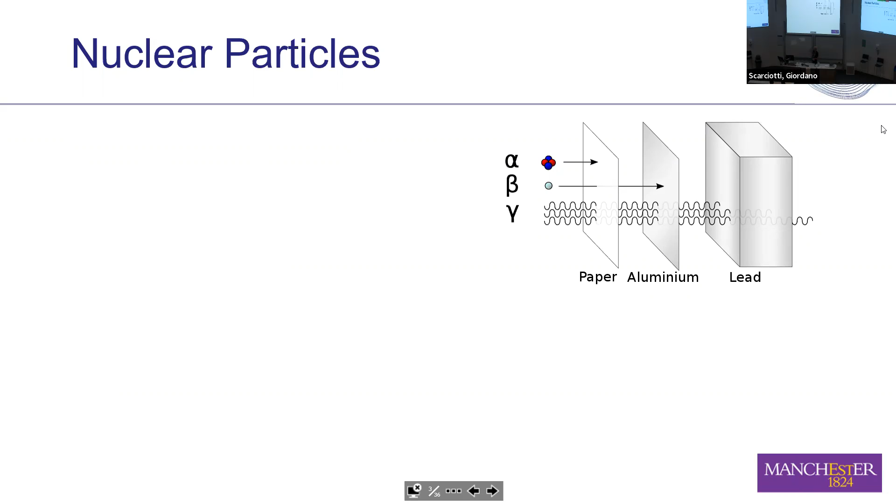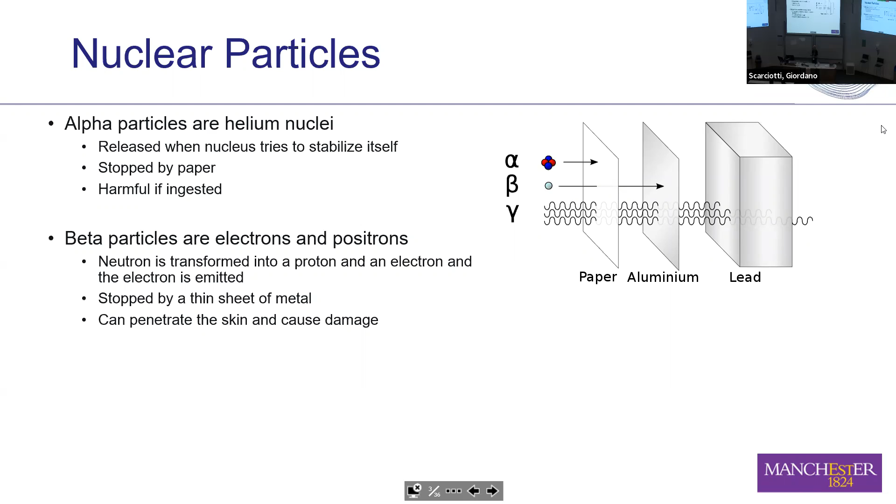So you'll all be familiar with this, but to explain why robots are needed in certain situations, you'll remember from school, and maybe some of you were trained physicists, so you'll be able to prove me wrong. But you've got three main types of particles: alpha, beta, gamma. Alpha's stopped by a piece of paper. It's very harmful, but only when you ingest it. Beta are electrons and positrons, and they'll be stopped by a sheet of aluminium, and they do cause some damage to the skin. And you have gamma, and gamma is probably the heart of the challenge that we have. Gamma will penetrate through large dense materials, so it goes into your body and it causes damage. So a lot of nuclear environments will have alpha, beta, gamma.

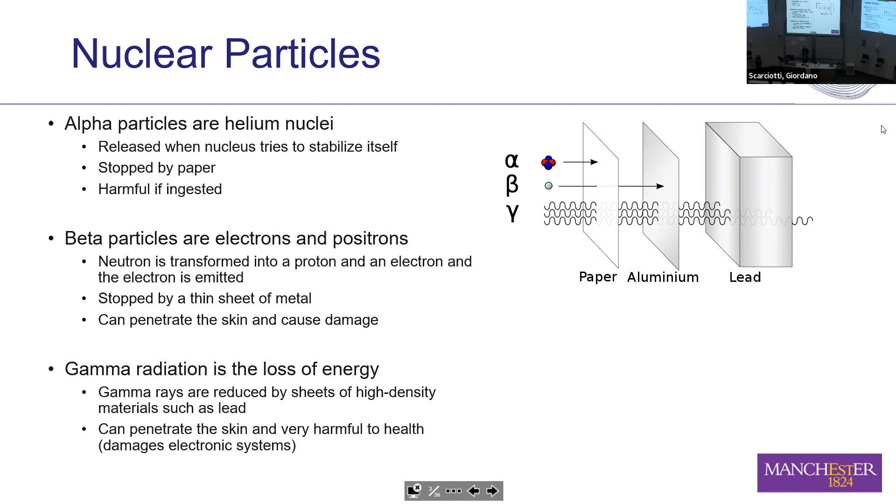And depending on which things they have in there, sometimes it means that people can't go in at all. Sometimes it means people can go in, but they have to wear a suit. So if it's alpha, people can go in, but you don't necessarily want them to go in. And this is really why we have issues with nuclear, and it's really down to uranium.

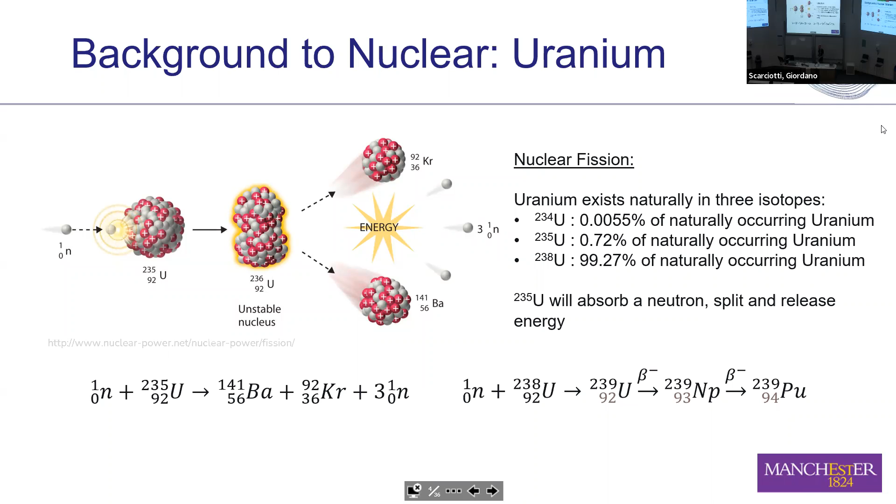So in weapons programs, an emphasis is on trying to enhance and enrich the uranium-235. So if you've seen Top Gun Maverick recently, the bad guys in Top Gun Maverick were enriching uranium so they could make weapons out of it. The alternative one, and this is the approach that we took in the UK after the Second World War, is you get uranium-238, you bombard it with neutrons, and that produces plutonium, and then you can make plutonium weapons. So that's the general theory.

The problems you get - inside this pile reactor, you get plutonium being produced. What you would then do is have lots of laboratories and processing facilities to extract that plutonium so you can make it into weapons or whatever else you wanted to do with it.

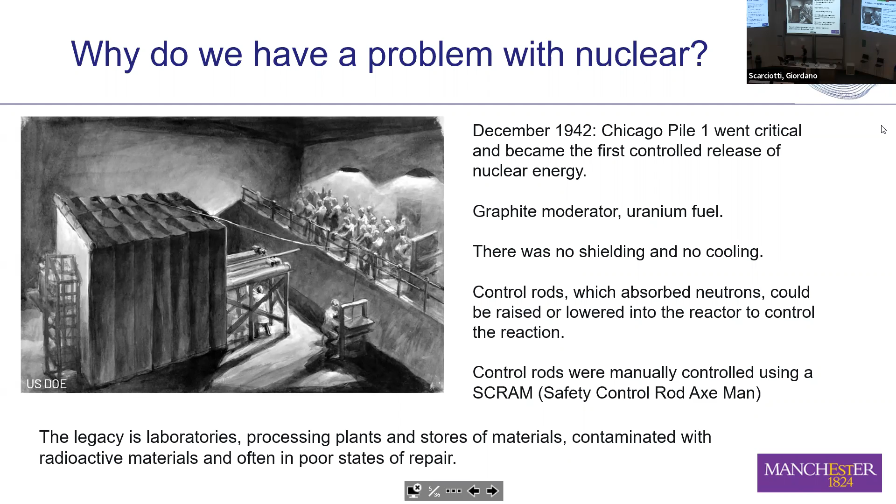Now there's no working reactors on there. There hasn't been working reactors for a long time - it's just a decommissioning site. So what we need to do now is demolish this, make it safe, and extract all the radioactive materials which are still on site.

There are still lots of radioactive materials on site, so we have to safely extract them, store them, and reduce the harm. Most of the things on this site were designed to last for 20 years - that was all developed in the 1950s, 1960s. Well, it's now much more than 20 years, so there's been damage to those buildings and structures. There's a real emphasis now, a real need to try to speed up the decommissioning of it so that you don't have additional problems.

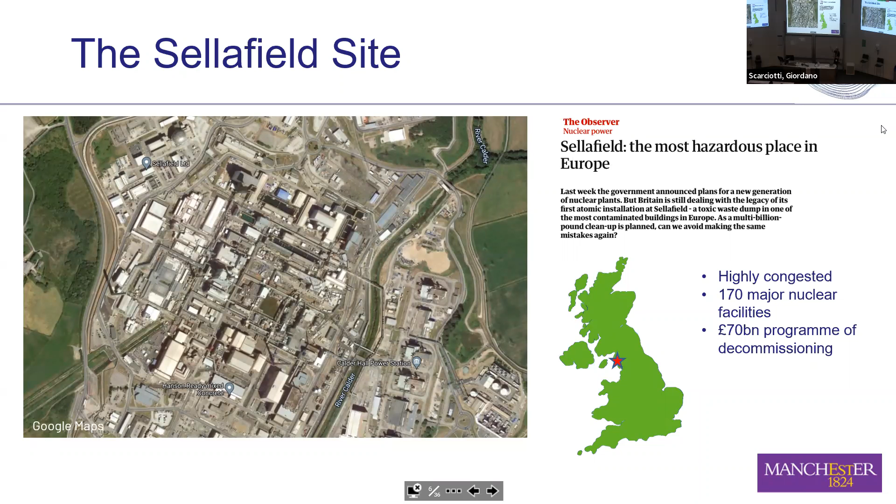So it costs a lot of money. What we want to do is develop robotic systems that can go in there and reduce people's harm so people don't have to go into the site to decommission. This is how some of the decommissioning is going on at the moment.

The problem with that is that if you slice through your suit, you then potentially get alpha contamination through the suit. You could ingest alpha contamination, and that would cause health problems.

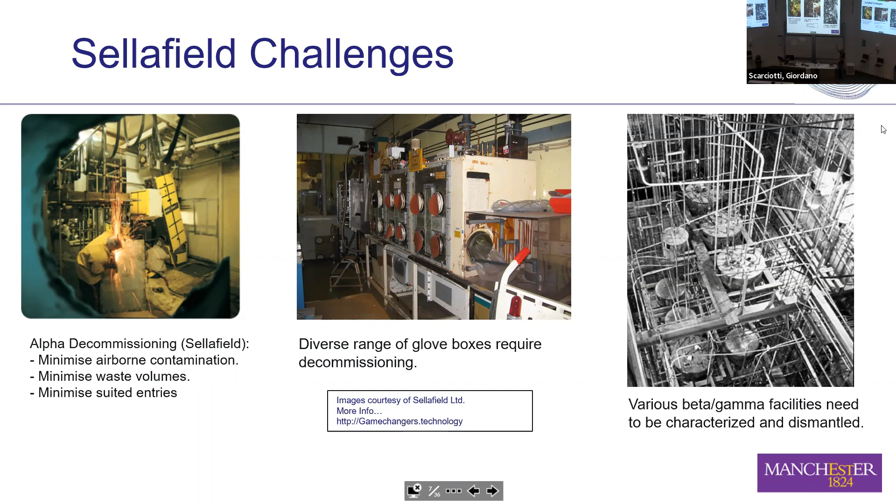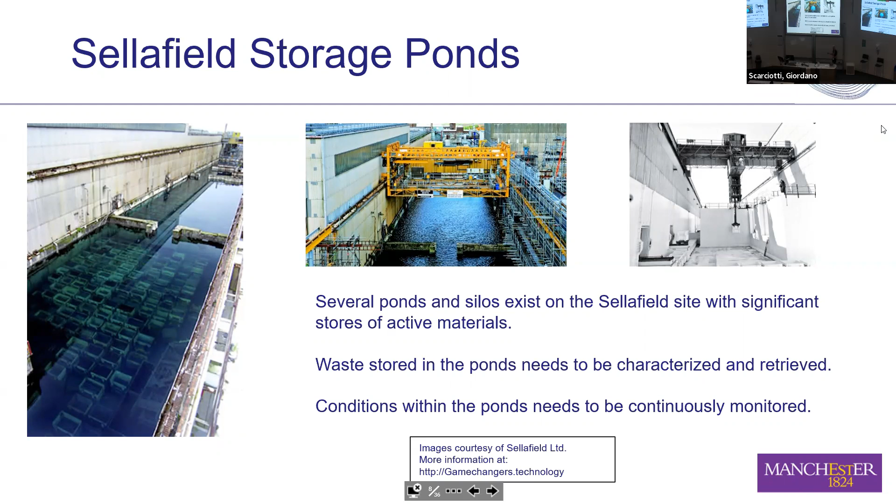What we want to do is develop robotic systems that can go in and tell people exactly where the radioactive materials are, what materials there were, and allow them to better plan their decommissioning. It's not just the UK - you've got similar sites in America and other countries. You'll all be familiar with Fukushima Daiichi.

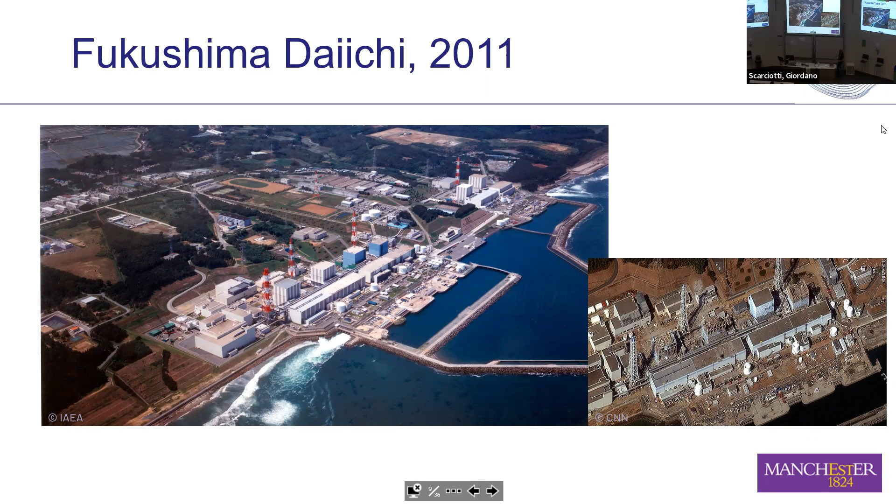This is the 4 reactors here, the main 4 reactors. There's 2 other reactors over here which were unaffected, and this was after the problems caused by the tsunami. 3 of the reactors exploded. One of them didn't, and now these are having to be decommissioned.

What happened at Fukushima? You have a big stainless steel reactor. This contains the uranium fuel. There was no cooling water going to it, so the uranium fuel heated up. It then melted through the stainless steel vessel and dropped down into what's called the pedestal. This is submerged in water, which keeps it cool and also shields it.

So what they now need to do in Japan is get robotic means so they can extract this fuel and remove it from the reactor. You can see this is progress - this was immediately after the accident. It's now 10 years later, and it is in a much fitter state. The photo was a few years old, so it's not quite current.

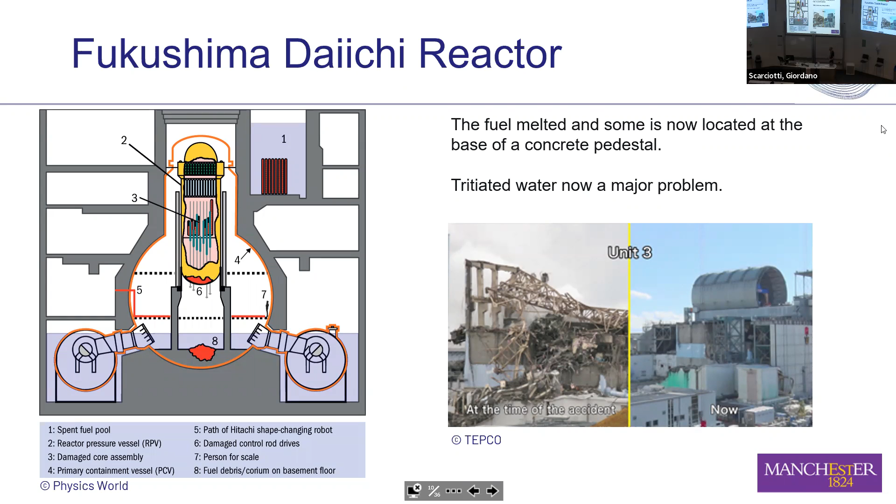So that's where we came in. We established this RAIN program funded by UK Research and Innovation. It's quite a large program - about 30 researchers, 30 postdocs, and about 30 academic staff. Some of the people are here; these are the people that have done all the work. It's 10 universities and the UK Atomic Energy Authority's RACE Robotics Centre.

We were trying to provide that bridge between what people are doing in academia with robotics and what industry needs. So there's a pull from industry, but there isn't a supply chain that is developing these robotic solutions.

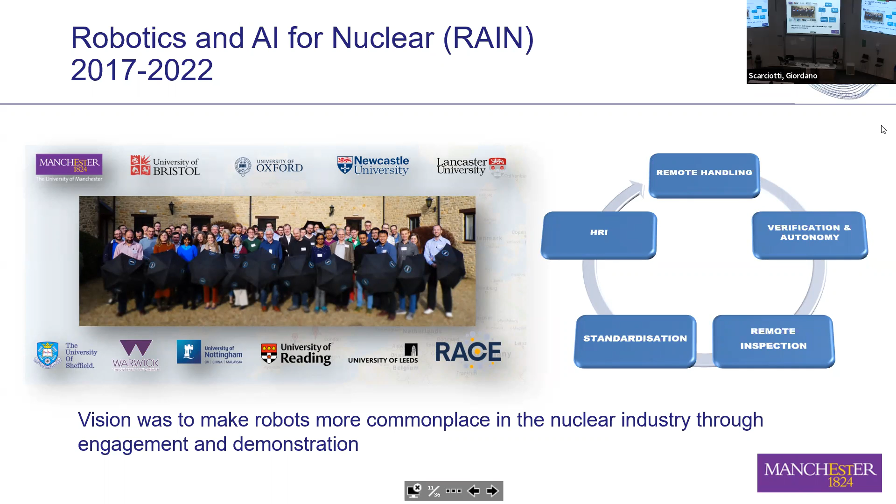So I said we were looking mainly at Sellafield. This is Dounreay - you'll notice they're all in very remote parts of the country. Dounreay was where we were developing fast breeder reactors many years ago; that needs to be decommissioned. Sellafield has a decommissioning lifespan of over 100 years, so it gets me through my career, and everyone here will still have a career if you want to work in the nuclear industry.

It's not just these old sites - we're also interested in fusion. Fusion is potentially fantastic, but these things are really radioactive. You can't just walk inside them; you do need robotic systems to go inside them.

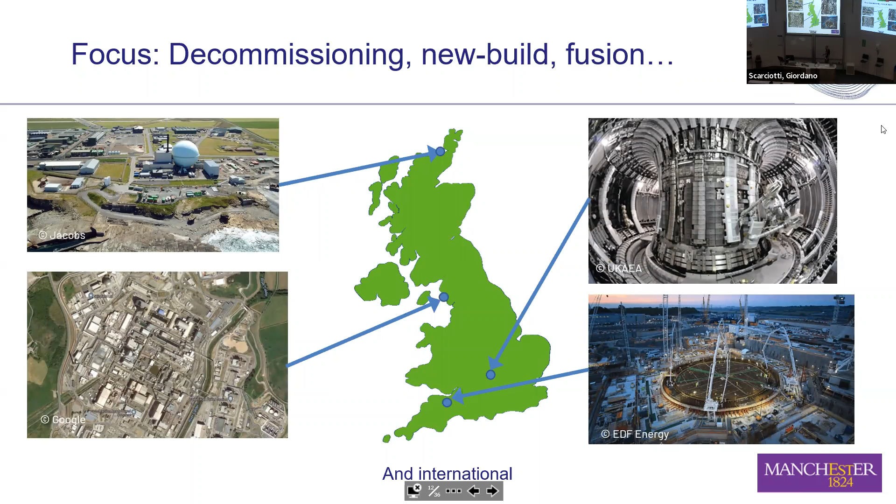And new build reactors - we still need monitoring and surveillance of reactors and new reactors, and it's better to use robots to do that. So I'll go through remote inspection. This is where we go in and survey or inspect a facility, and we look at it in 3 different parts: developing the platform, and the sensing and perception.

So what the robots are is just platforms - platforms to put sensors on. We take the sensors in, and then we do things with the sensors. What we want is a high-level system that does the mission planning and tells the robot where it needs to go.

So these are some of the platforms we've been developing. I'll go through a few examples - it's a mixture of different robots. This one up here is a commercial robot, and we put the sensors on with support from different universities who have expertise in different sensing. Some are bespoke - this is a design we developed ourselves, a floating platform, and this is a Stewart mechanical platform developed by Nottingham.

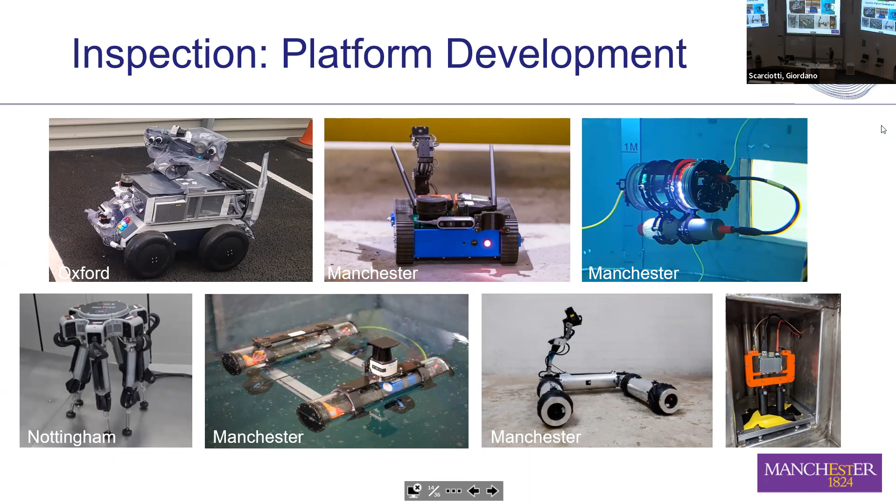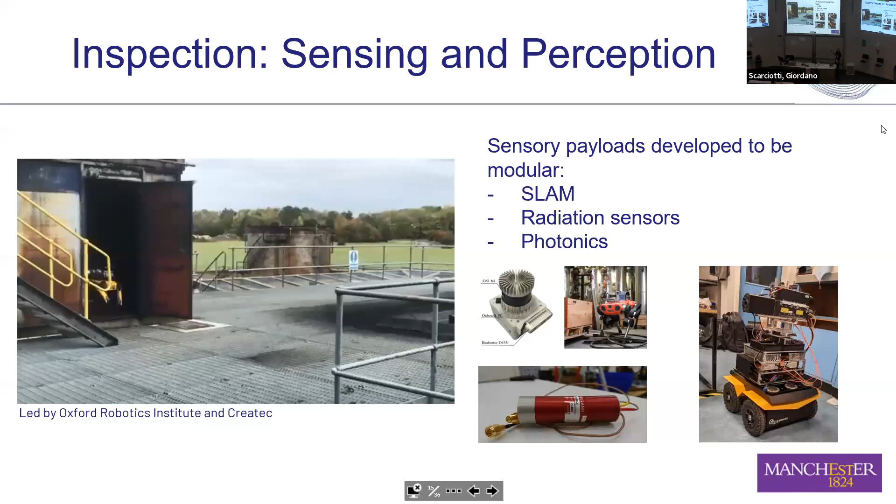So I'll go through some examples of each of these. This first one is from Oxford Robotics Institute and a small company called Createc. You've all seen a Spot robot - it is a brilliant robot. One of the problems with Spot is that people look at it and just assume robotics is solved, because it is really, really good. It doesn't do everything, but it is a brilliant platform.

So what's happening here is Spot is being manually driven around this processing facility - somebody's got a joystick and is just moving it around. It can go up and down steps, and as it's going around, it's building a multi-floor map of the facility. One of the issues with a nuclear environment - this is a nice clean environment with no active materials - is that in a radioactive environment the robot itself can become contaminated. It doesn't become radioactive itself, but it becomes contaminated - it might pick up plutonium powders or other materials.

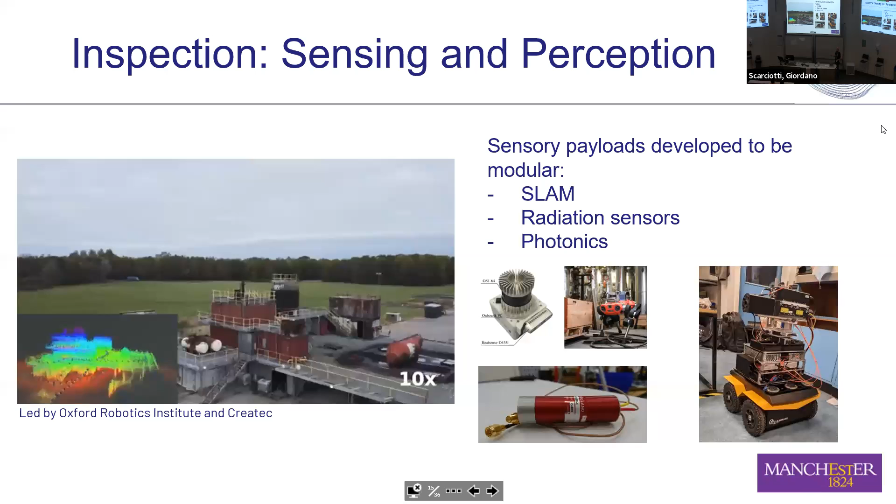That means we can't take them back to the lab. So once you've deployed a robot onto a site, often we can't get it back, so you lose it. So in this case, you might be losing a £100,000 piece of equipment. So we want the robots to be low cost because they can then be disposable.

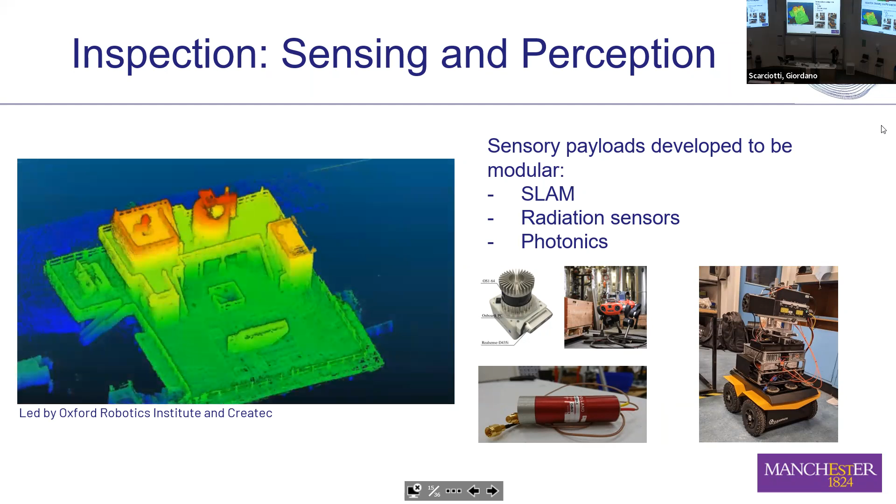So here it's got the full map of the facility, and what we then might want the robot to do is to go back in the future. So you might want it to weekly, daily go back and survey around. So here it's set up so it's got a route that it wants to go around, and then you've got waypoints, and you can program the robot to do particular things at those waypoints. You can ask it to take a measurement, and then you can do data analysis where you're comparing that measurement with measurements you might have taken in the past.

So these are the kind of sensors. This is the LiDAR, which most of you are probably familiar with, where you get the 3D images from. It sends laser pulses out. This is an example of a radiation detector, and we also put photonics equipment, and it's any equipment that can give you a better idea of what materials you're looking at.

This is one of the few robots that's actually been on a nuclear site and done something that is, well, quite useful. So robots aren't used that frequently in the nuclear industry. This is one robot that we developed at Manchester. It was used up at Dounreay, and the purpose of it was that at Dounreay they had an underground duct. It's 150 meters long. It sits underneath this corridor. It's got about a meter of concrete separating the duct, the tunnel, from the corridor. Nobody had looked through this duct for about 20 or 30 years.

There are occasional access points every 20 meters or so. There's an access point, so you can lift it up. You've got materials in here that could cause problems, so you'd have to put containment around it, lift it up, and then you could have a look in. So we developed this robot here to explore along this corridor.

So it's got a tracked base. We developed this. It's got a manipulator arm which lifts this puck up to take swabs. It's got 4 or 5 detectors on the back of it, and it's driven. It's wireless. You weren't allowed a tether because the tether would be quite thick and it would pick up contamination, and so it couldn't be cleaned. I'll show you a little video in a minute. But this has got a fishing line. That was considered thin enough that if there was a problem with it, you could pull the robot back.

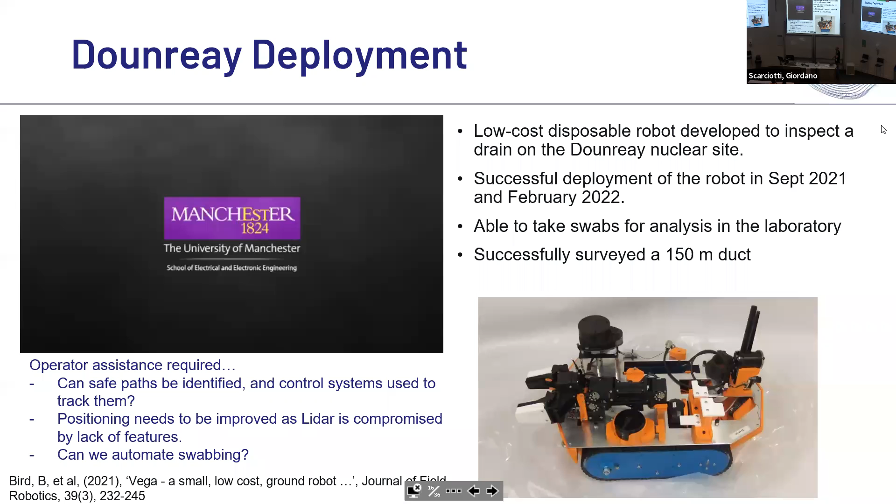So this now shows the robot going in through this duct. So it's lowered down. We're not allowed to do the lowering down of the robot. It goes in behind containment, and it's operations staff that do all that. So we have to shout to them through a plastic cover. So here it is going down. You can see the hook on it, and that's for dragging it back if we get into problems. And it's really a method of last resort.

You can see there's a bit of rubble. There's discarded gloves over here. And so what they wanted was to get an understanding of how much radioactive material was along this corridor. It's terrifying when you're driving this thing. So it stopped here because there's a load of rubble, and we have to make a judgment. Can we drive it over that rubble, or will it get stuck? If it gets beached, we then have the potential problem that it's stuck. And if it gets stuck, then we're in a lot of trouble. So my approach was I drove at full speed over the rubble, and thankfully it worked, but it's quite scary.

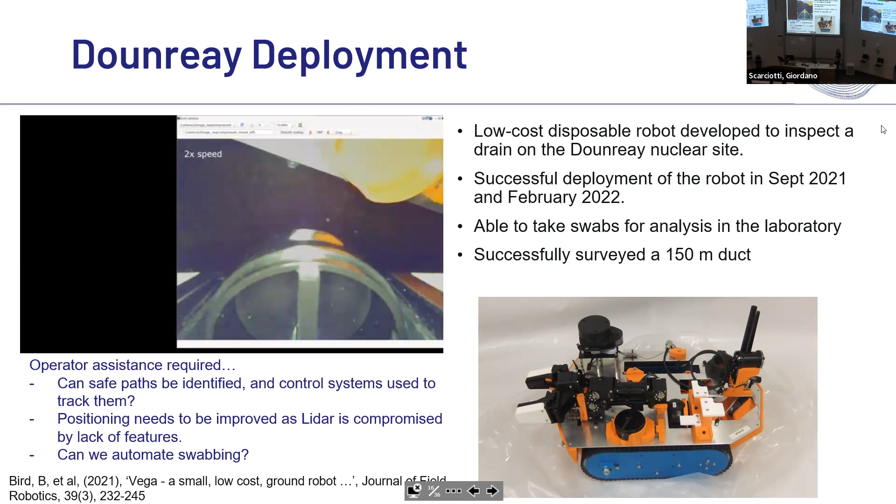And here we're taking a swab sample. This is quite a difficult maneuver. It's all done remotely, teleoperation. What we want to do is make these systems more autonomous. We'd like this to be done with an automated system. So you press a button, it picks up the swab and it automatically rubs it on a surface. And then it puts it back, it brings it back, and then an operator can take that swab out and take it to a lab.

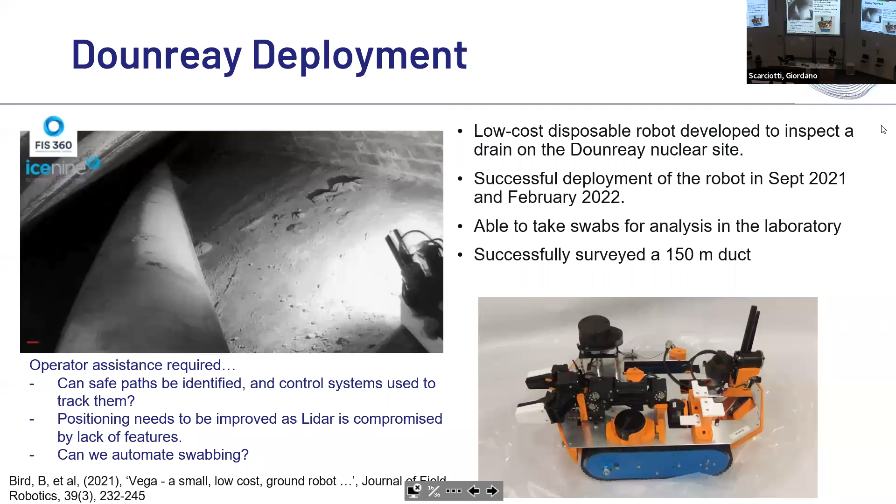I'd also like to know, when we encounter some rubble, which route we should take over the rubble. We'll probably be doing the driving, but it would be nice to be able to say, well, this is the route you should take, and you will get over it without any problems.

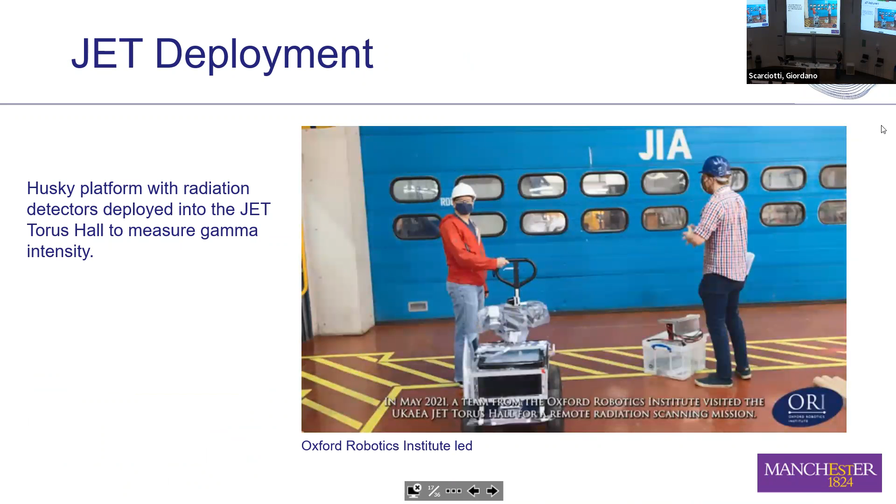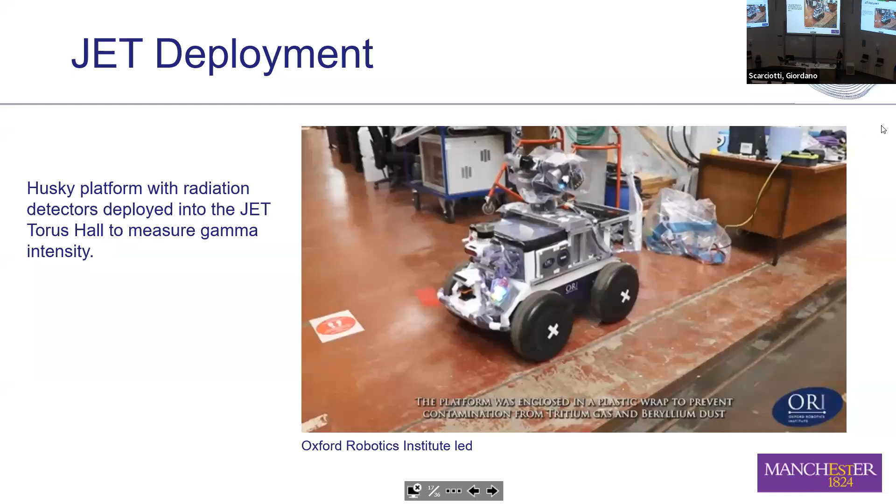This is a similar robot, but this time it's an off-the-shelf robot, and it's gone now. But what you can see is all this plastic covering. This is going around a fusion reactor, the JET fusion reactor just outside Oxford, and it's covered in plastic. And the reason for that is that around a fusion reactor, you'll get gamma, you'll also get neutrons, and you also get beryllium dust, and beryllium dust is really toxic.

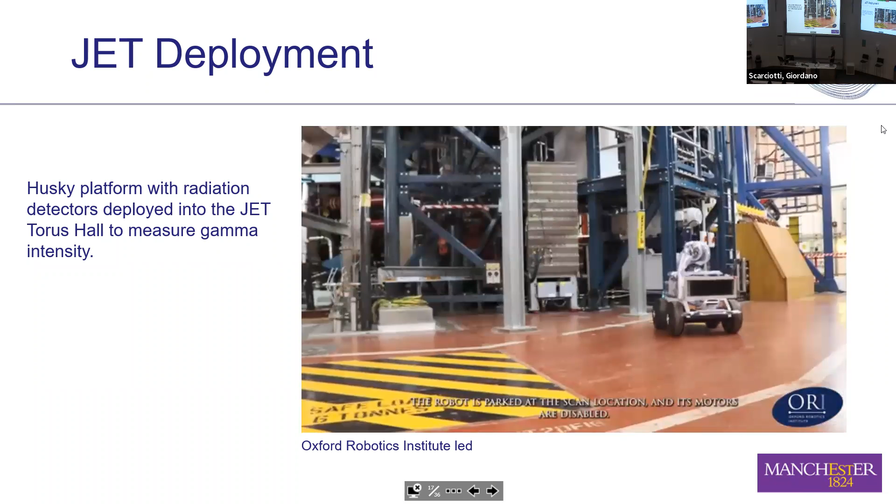And so you put the plastic coating around it with the expectation that if it picks up any dust, you can remove the plastic coating and you should still be able to take the robot home with you. The one that we deployed at Dounreay is now still at Dounreay. It will always be at Dounreay. We'll never get it back again. So we lose however many thousands of pounds that robot is. This one, they needed it back, and it's a cleaner environment.

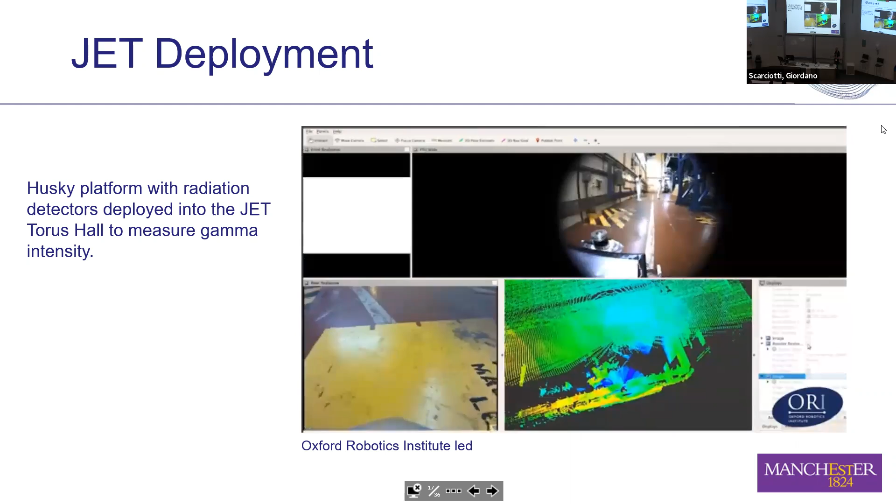And so it gets a scan of the environment, and it also measures the radiation at various points, and that's to confirm physicists' models. So the physicists have an idea of what happens in a reactor, and this is trying to confirm what they think happens. But the radiation that you have, it affects people. So gamma radiation in particular, you can't go into a gamma environment for any sustained period of time because it will cause health problems. It will kill. It also damages the electronics within robots.

So in many environments, if you've got radiation in the corner, those of you at the back might be fine because it attenuates. It doesn't travel all the way to the far ends. Those of you a little bit closer would probably have health problems. And so what we try to do is map the radiation without going into those radiation areas.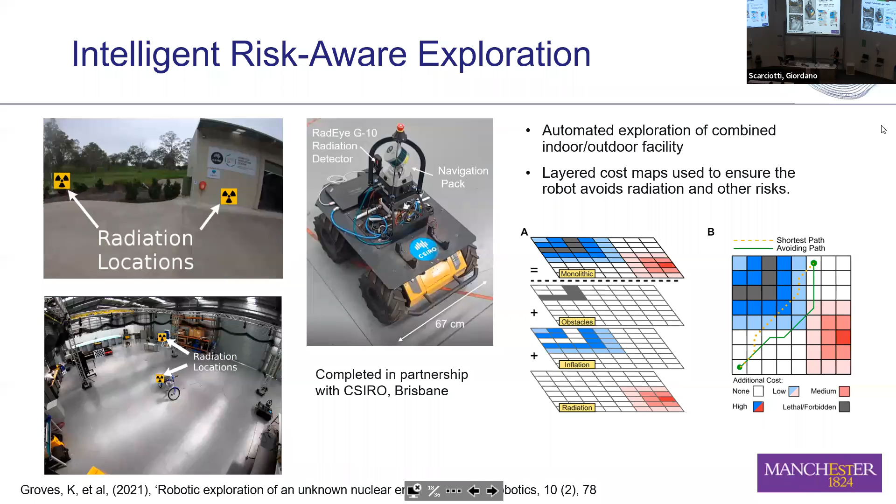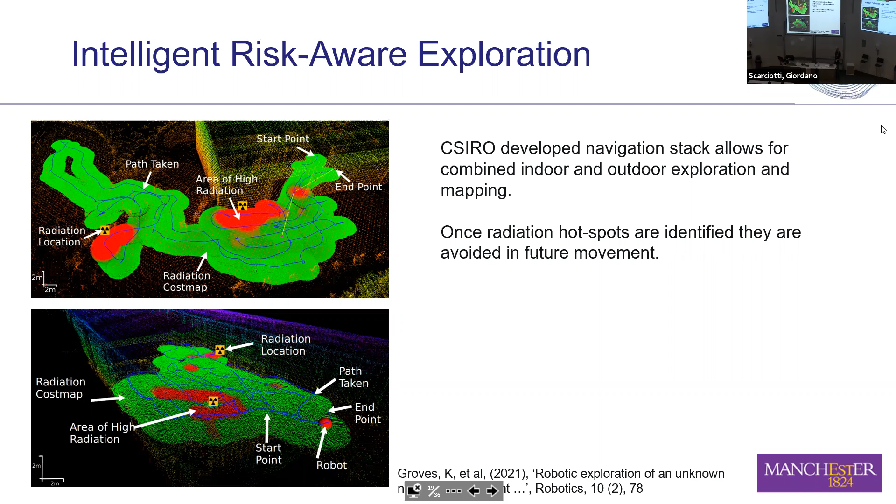We set up cost maps, so we avoid obstructions. We work out where the obstructions are, and we try to avoid the obstructions, and we also try to avoid the radiation areas. It's a soft constraint because we can go into those areas. We just don't really want to. And this is, I suppose, taking it to the other extreme.

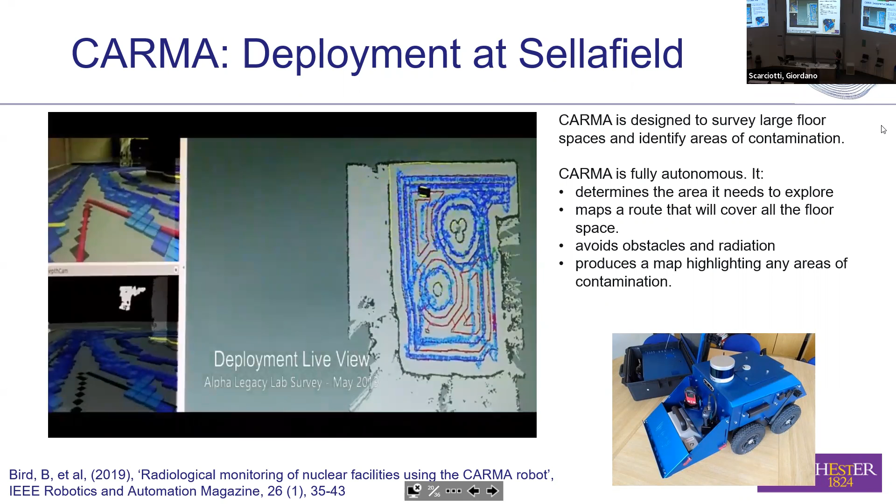This is a robot with radiation detectors in. It's fully autonomous, and here it's detecting alpha radiation, so it's got to be very close to the ground. It's got to move very, very slowly to detect alpha contamination. It builds up a map. It autonomously knows where the walls are. It autonomously works out which route it should take to cover all the floor space, and then it navigates itself around.

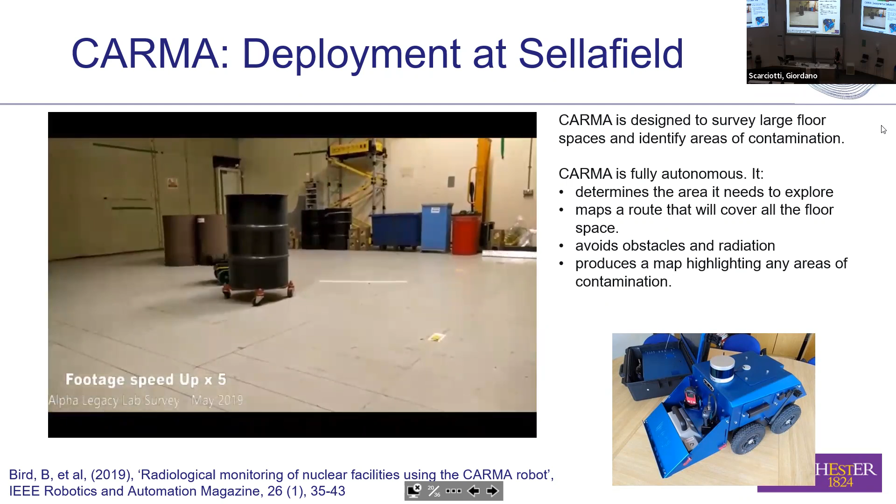And on that map, you could see there were some red patches, and that's where it's identified that there's some alpha contamination. So this is an area where people can go into, but you wouldn't necessarily want people to go into because it's potentially alpha contamination. So again, with this, it's the control systems. We need to develop the control systems, which is not too complicated in this case. We're just following a path. We've got optimization systems which need to be able to detect that there is radiation ahead, and so what path do we take to get around those radiation patches?

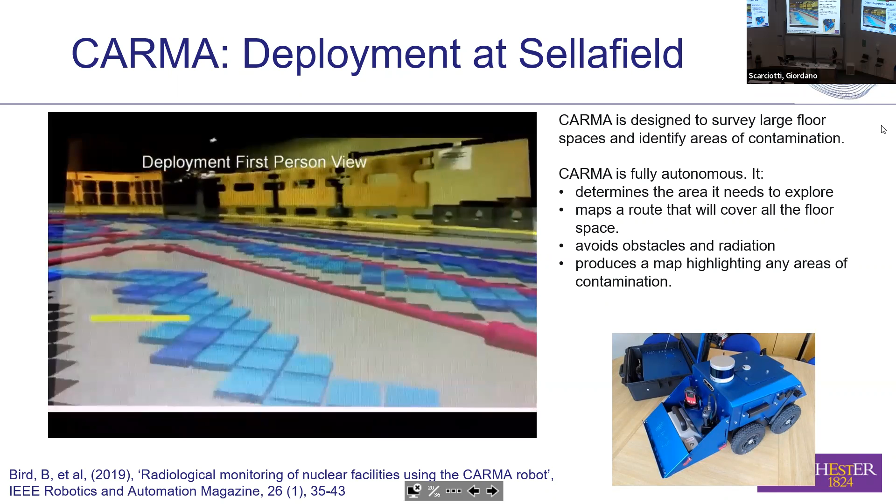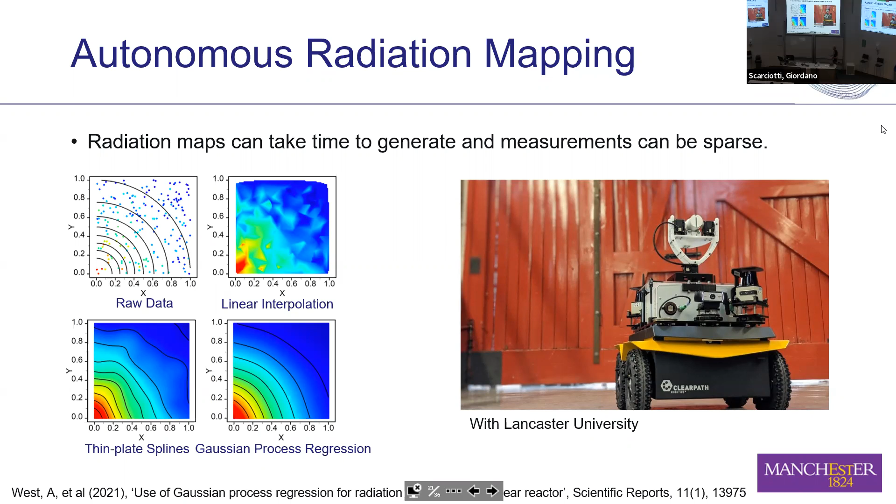And if we do linear interpolation, this is the kind of map that you'd get. And we know that radiation looks something like that. If you've got a source over here, it attenuates quite nicely with an inverse square law. So we use Gaussian process regression to generate these radiation maps.

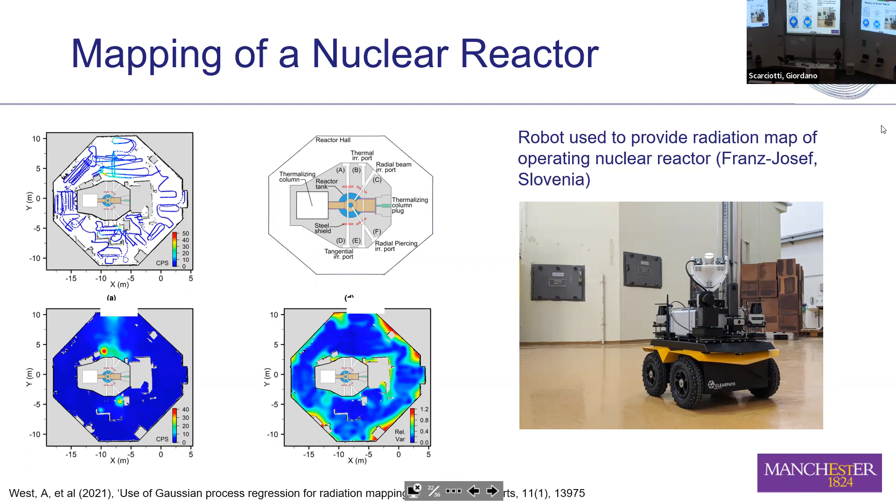And with Gaussian process regression, what's nice about it is you get a map which gives you confidence. So here we've got lots of confidence where it's dark blue. We've got lots of confidence in the measurements. Here you can see that we have little confidence, and that's because we didn't take many measurements over this area. So it looks like there's no contamination here, but you probably want to go into those areas just to check, because you haven't got as much confidence. And so we developed the algorithms which automatically go around these facilities.

I showed you earlier that you had ponds. So we're also looking at developing robots to go into those ponds. This is one that we've developed. Rather than wheels, it's just got thrusters on the bottom. So the same control systems go on it as with the wheeled vehicles. What you do need for this is a big pond. We don't always have ponds available. So this is a land-based simulation of it.

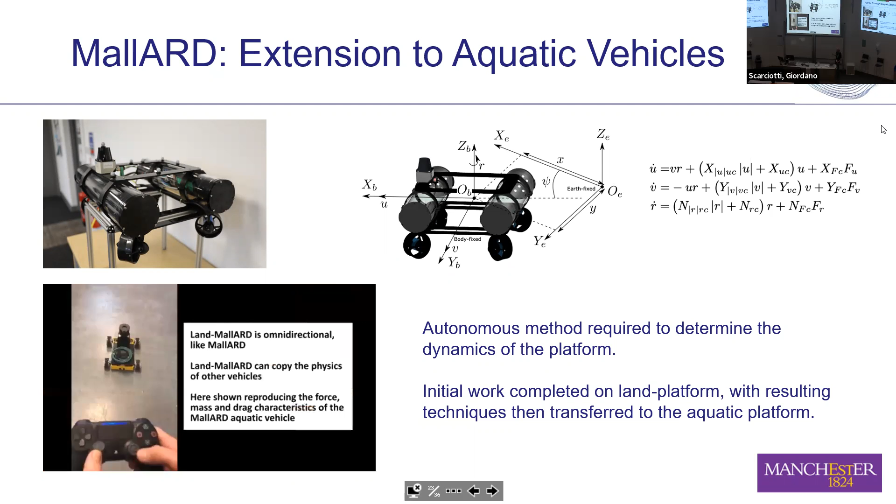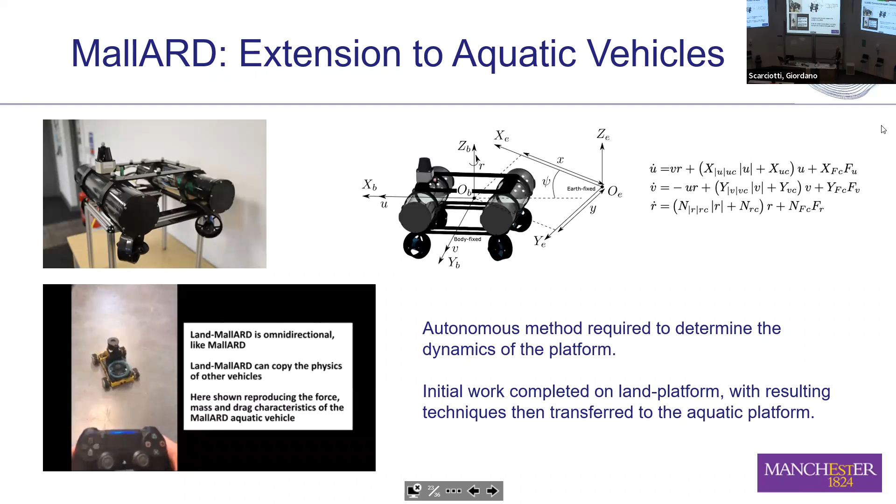So it's got these omnidirectional wheels, and now you can see as this person is moving it around, it behaves like a boat. So it has momentum and it moves around like a boat. That means that we can develop all the control systems on here, and then every now and again we can go to the facility where we have a great big pond of water, and test out the control systems in the real environment. So it just allows us to work in a lab in a much easier way.

And this is that platform as it moves around the pond that we've got. So this is the platform. It scans the wall, so it works out where the wall is. It works out a route for it to follow, and then the robot would just go up and down and follow that path. This was designed for the IAEA, the International Atomic Energy Agency.

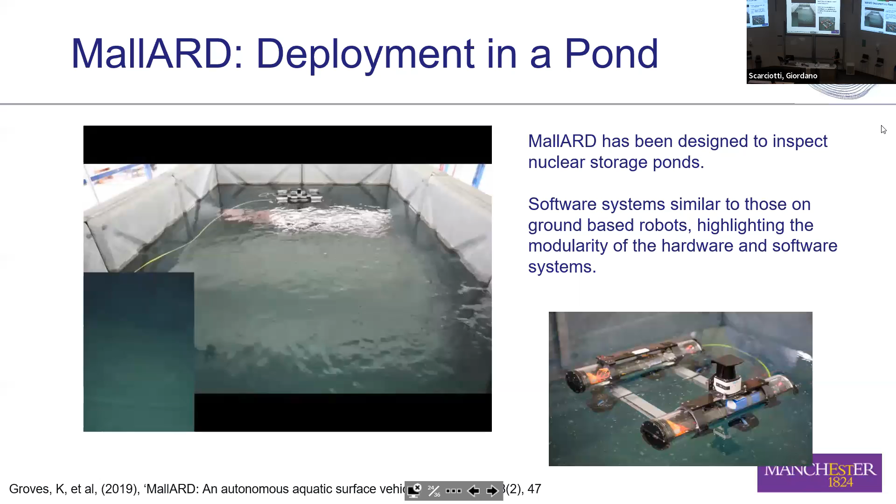They go out and they have to check storage facilities where you've got nuclear material. In ponds you would put the fuel assemblies, so the uranium fuel would be in a pond, and they need to go in and check that that nuclear fuel is still in there. And so this just goes up and down and checks that the fuel is there. And this is the control systems that we get for it.

So one of the problems is that we want it to be autonomous. So we just want to chuck this platform in, and we want it to go up and down. Its dynamics will change as the payload changes. So you put a new weight on it, and it might behave differently. So what we do is we drop it in a pond, put some excitation in it. We've got a mathematical model of the robot, and we either fit a classical parametric model using least squares, or we can do something a bit more complicated and use neural network models.

This is the training data, and this is the testing data. So the neural network, you'd expect, works a bit better than just using least squares. So we can then auto-tune the system.

This demonstrates the path that the robot followed. We wanted it to follow this square lawnmower pattern, and you can see it deviates. It's a PD controller that's on it.

A constant source of frustration is, firstly, PID control works really well most of the time, and there's all these brilliant controllers that are developed. PID normally is good enough. In here, you can see all it needs really is a predictive control, and you'd get a really nice tight fit to your set point.

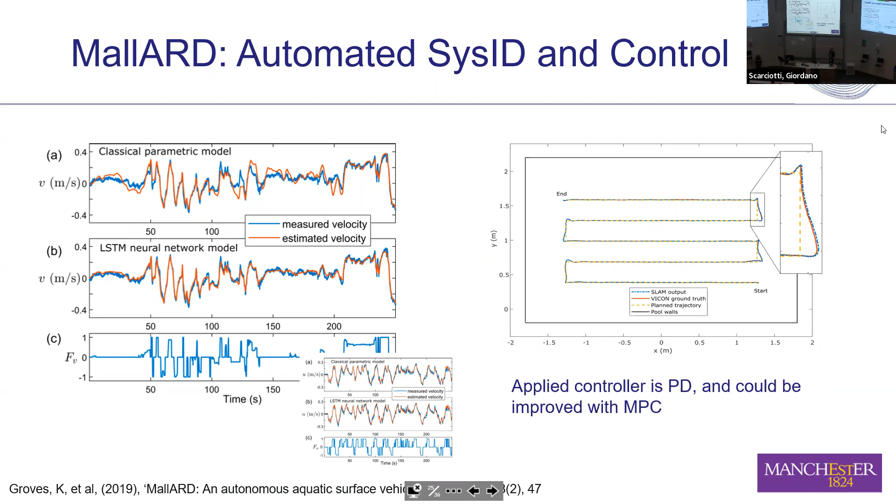What I found with the more applied robotics engineers, the maths is my level of maths, it's not your level of maths. So if you make things simple, they'll apply these fancy control algorithms. If it's complicated and lots of maths, they're not patient enough to go through all the maths and implement it. So if you've got fancy control systems that you want to see applied, make the software available, and you'll get more uptake, certainly from robotics people.

This is a robot that we've deployed at the Sellafield site, another submersible robot. It had to go through a 6-inch hole, so it goes in through the 6-inch hole. This was its first prototype, shown here on the right, and the prototype had little thrusters at the side, little water pumps, so it could finely tune and move around inside the facility.

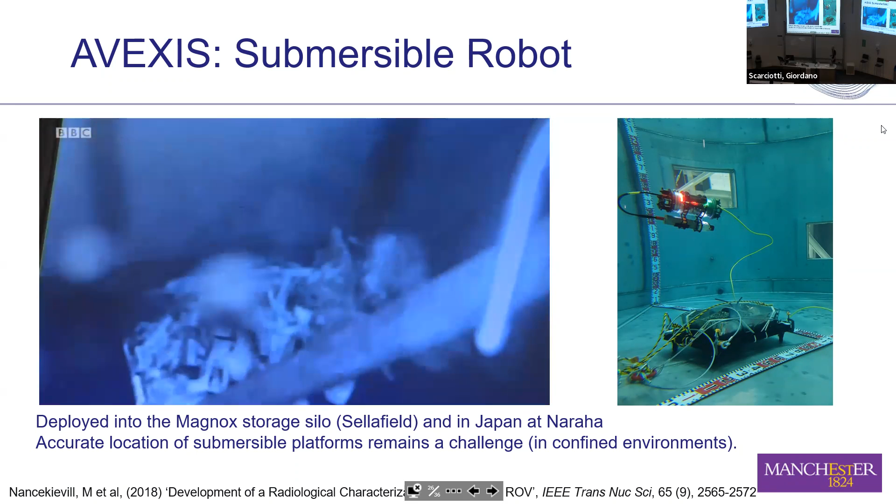What was a bit frustrating, this went into one of the facilities on the Sellafield site, and they used it as a battering ram. They just used it to bash material around inside this silo, which was a bit frustrating. Lots of work, and they're just using it as a battering ram.

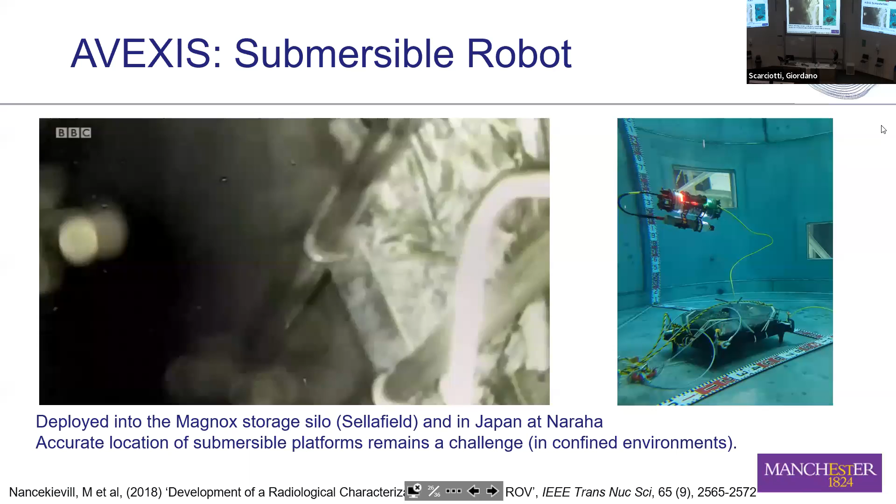This is the test in Japan to support some of the Fukushima work. This is a sonar on the bottom, and what they wanted was the sonar to get a measure of where the metallic, molten materials were at the base of the reactor.

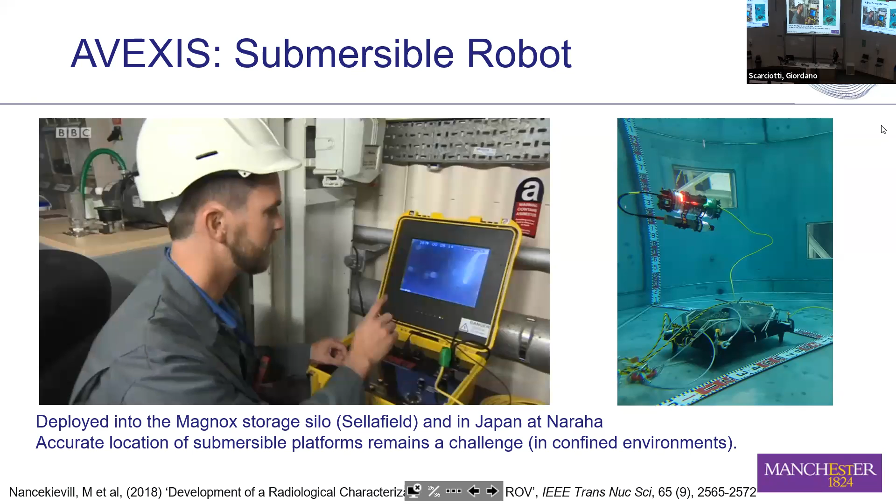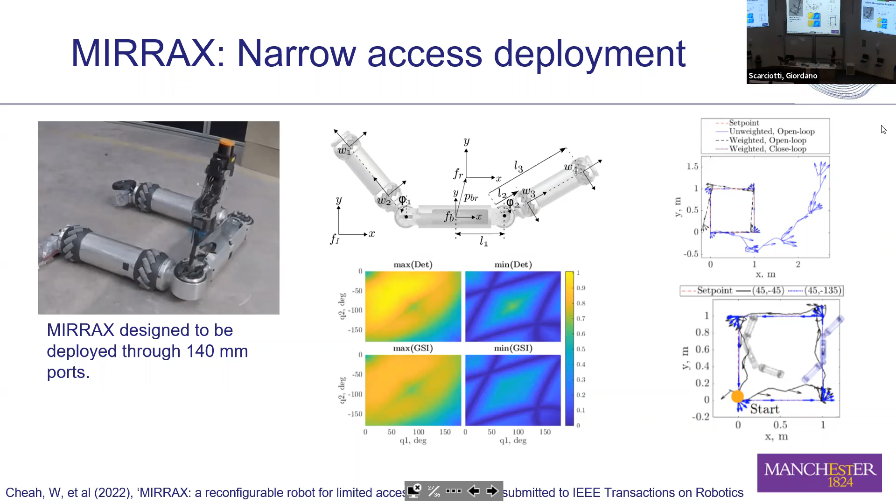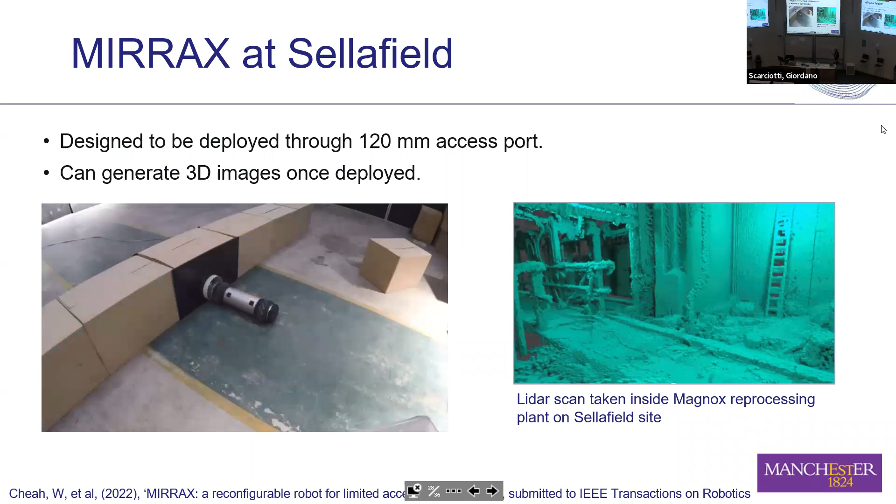This is the robot entering a facility, so it goes through a 6-inch, 140 millimeter hole in this case. It goes in, and these are the clever little omnidirectional wheels. Once it's in, it's much more stable in its U-shaped configuration.

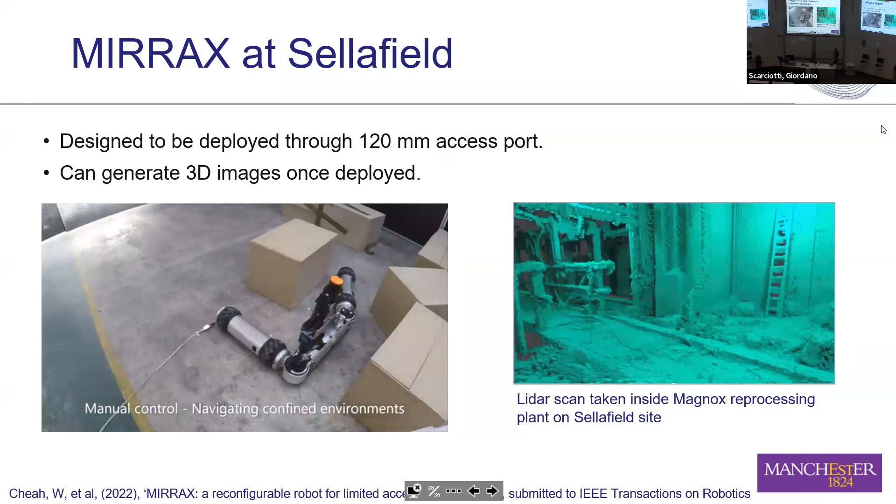It's got an arm that will lift up, and that's got a LiDAR on it, and other radiation measurements. You want the radiation measurements to be off the ground. Then we've got control systems, or it can be manually operated. The other benefit is in really highly congested environments, it can snake around and move through these areas.

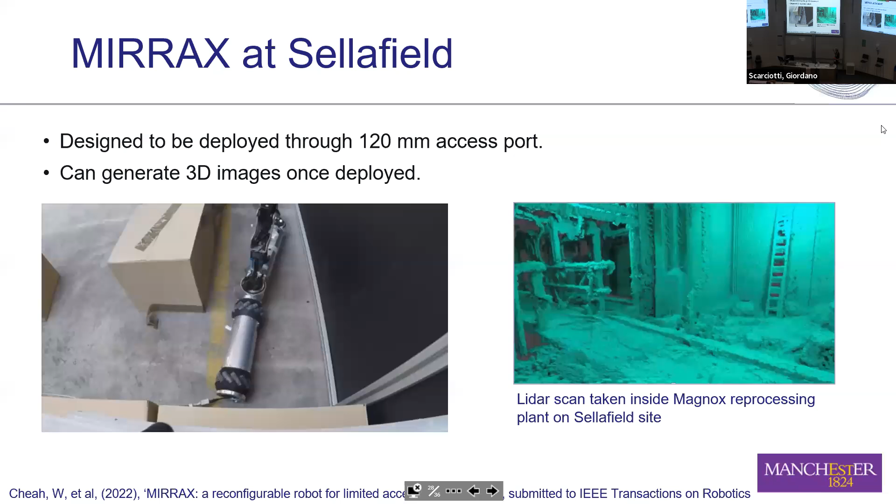This is what you get out of it, a scan of a facility. It was the first robot to go into this facility. The door hadn't been opened, nothing had been in for 30 years, so they didn't know what to expect. These facilities often are sealed up, and they don't know what's inside. You can see there's a ladder been left here, and lots of rubbish on the ground.

They're almost always dark, so it might work if... yeah, so it is a video.

If you want to see it, it's on YouTube. You can look around, it's got a full 3D image of the facility. And again, that helps them with future decommissioning of the environment.

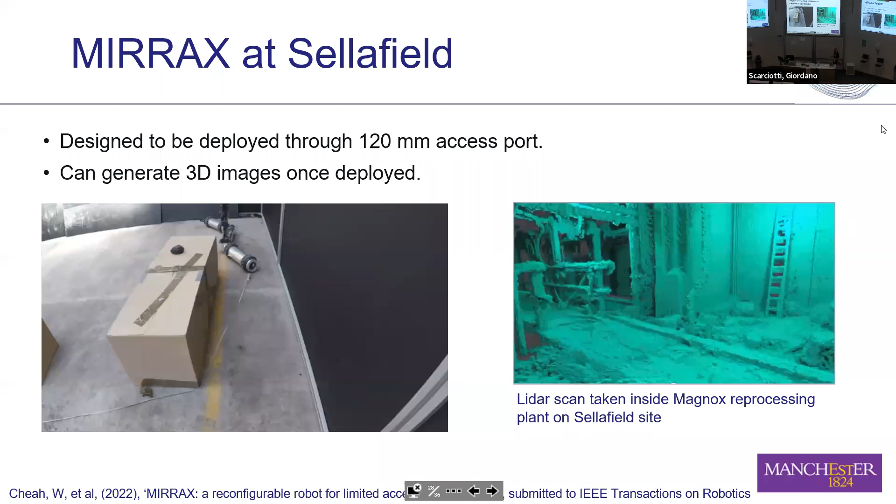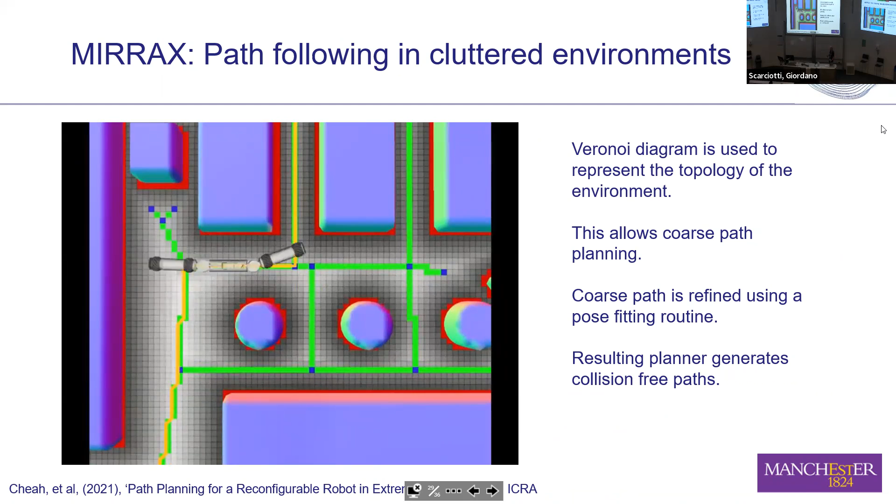What we're also able to do with this robot is we've got complex control and optimization routines to work out, well, here's a congested environment. We've got these obstructions, we've got a path that we want it to follow, and we might want to do particular activities at certain points.

I showed at the start that you have lots of glove boxes in the nuclear industry, and there's two aspects to glove boxes. We sometimes just want to operate and move things around in glove boxes, and other times we want to decommission and get inside them, empty them.

So if you imagine you left work one day, came in the next day and they said that facility is no longer in use, it's sealed off, and you might have left things in there - you'll have probably left your experimental equipment. So that all needs to be emptied out. But that happened 30, 40 years ago, so there's lots of things in those glove boxes.

So the operators - we want it to be as autonomous as we can. It's a highly conservative industry. They don't want things to be autonomous.

I think control is brilliant, because I think you have a problem at the moment that people are moving to machine learning and these deep learning things, and you have a black box, and you go along to the nuclear industry and say, my control system uses this brilliant black box, it solves all your problems. And they will say, well, what does the black box do? And how do you know it's always going to give you the correct answer?

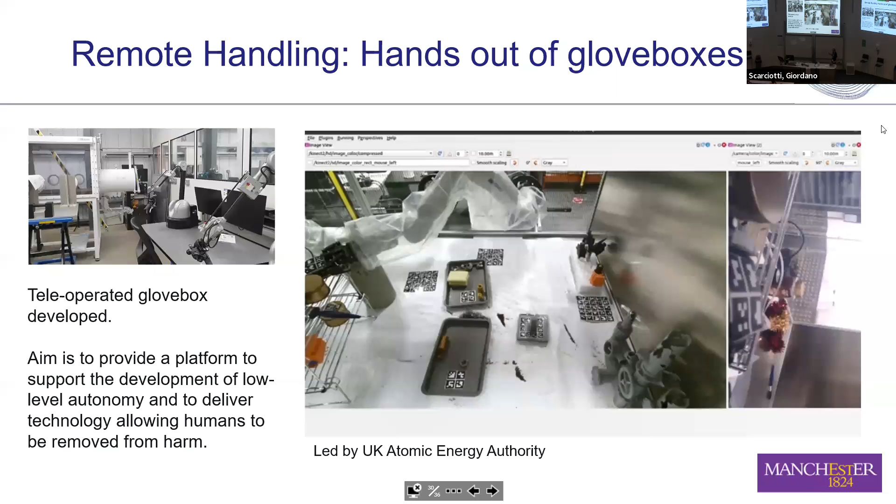The nice thing about most of the control work is it's all written down. You've got formulas for it, and it's explainable. That's a really strong point about control systems in this industry, that things are explainable and therefore they're more attractive to be used.

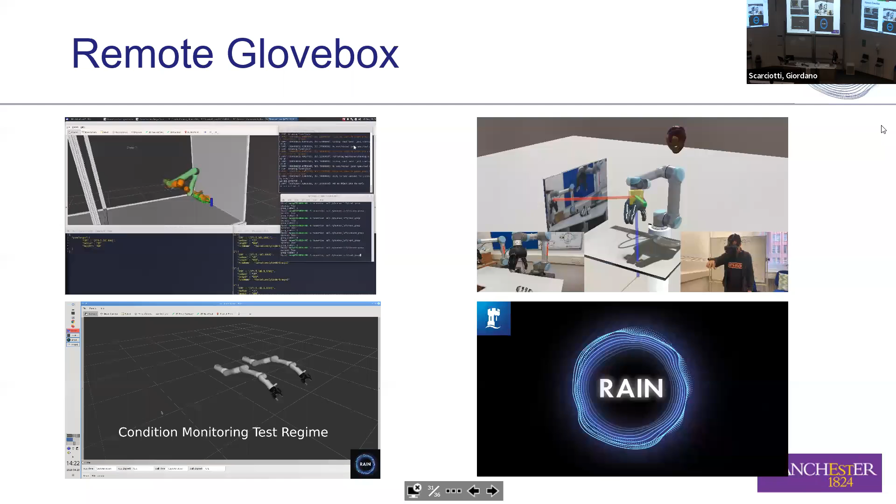This one's straightforward - these things are going to be used. So as in the presentation earlier about long-term autonomy, these things have to be in place for years and years. You can't go in and fix them because they're contaminated, so it's a health risk to go in and fix them in certain situations.

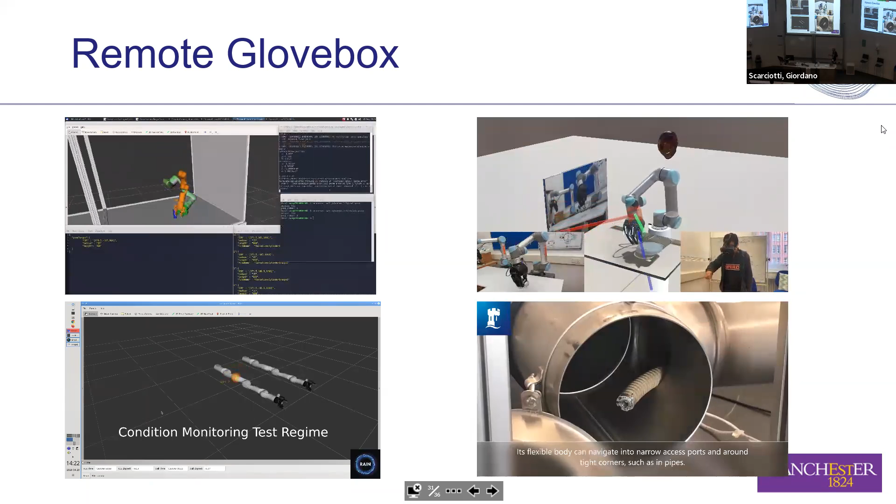So we can have things which sense when things aren't operating correctly, and then hopefully we'll have some fault-tolerant control systems in there, so if we lose degrees of freedom, we can still operate them.

This is trying to be able to operate things a little bit better. So here, VR glasses - this would be the view from these eyes that they get. But this is the virtual world; this is the real world, picking up cans of beer, and they've got a RealSense camera on the front here.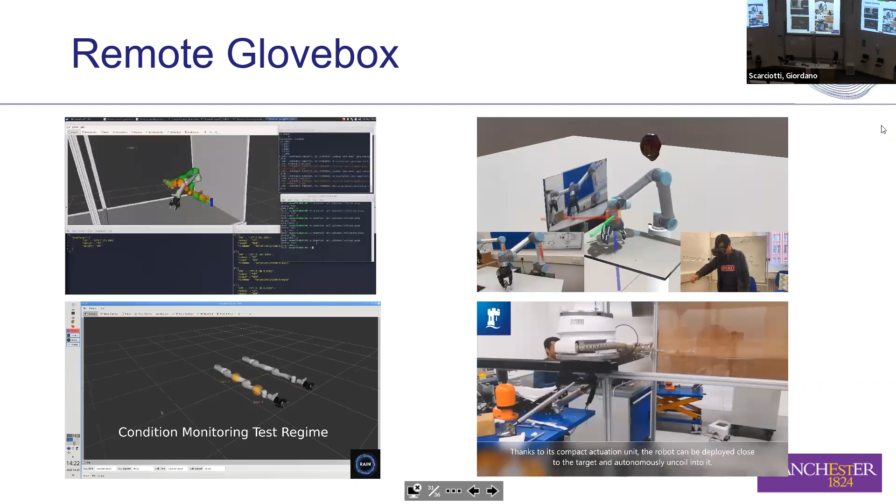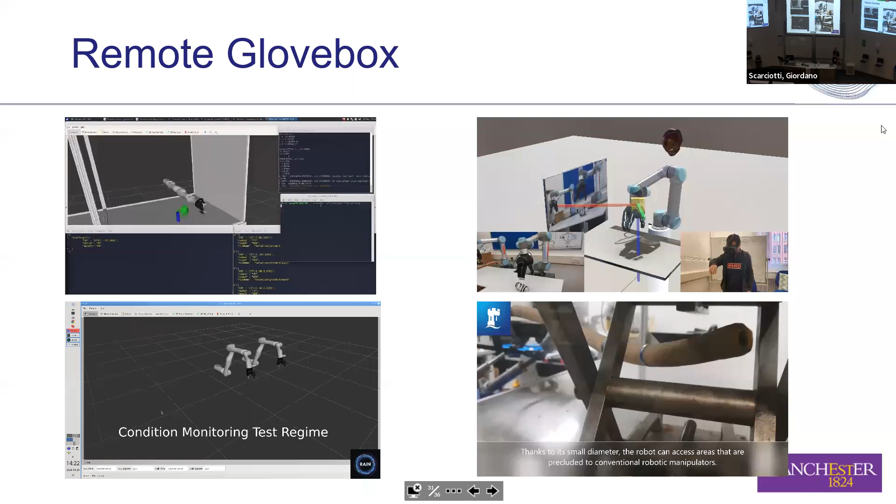And so as they move their hand, their bare hand, this gripper moves in sympathy with it. We're developing a control system so that you can cope with the delays, because you don't want to be right next to it. You might want to be some distance away, so there's some communication delays.

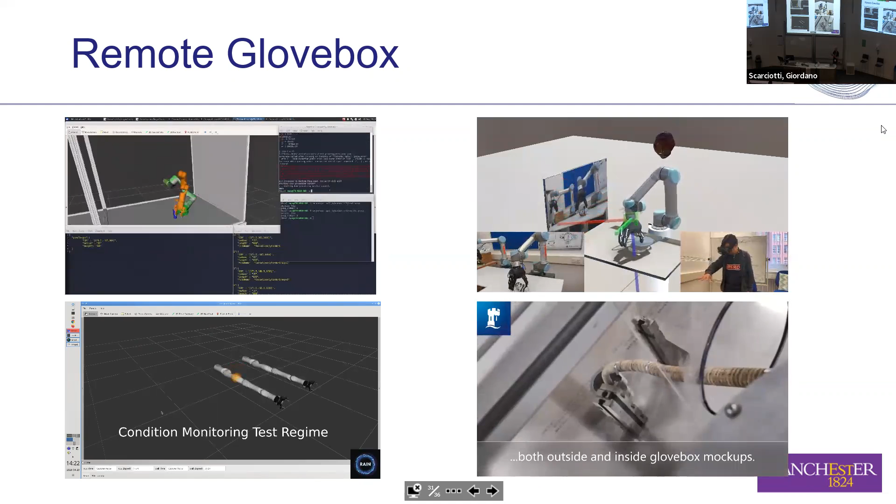And this is a snake robot developed by Nottingham University, and this can thread its way into some of these glove boxes. It's a tendon-driven arm, so again it's really complex control systems that you need to work out, what tendons should you pull. It's got, I think, 27 tendons on it. So what should you pull to get it into a particular shape so it can snake around and go into some of these areas?

We're also aware that what will be necessary in the future is you've got lots of robots that you're trying to control. So a lot of the robots I've shown you are inspection robots. That's because that's probably the first thing that you'll apply. You'll apply robots to do inspection because they can do less damage inspection.

So here's the user. This is the view through the virtual reality goggles. These are supposed to be the robots, they're simulated robots. So they make hand gestures and it tracks their hands, and that's with this camera on the front. So it tracks their arms.

What we'd actually like to do is we've got cyber gloves. Cyber gloves give you a kind of feedback, so you know when you're gripping onto something. Unfortunately, the camera doesn't work, and it can't see your hands and your joints when you're wearing it.

So here, what we're doing is just moving around and looking at the robots, and you can pick a robot up and essentially you change the set point of it, so the position you want it to be at. So here, picking it up and moving it somewhere, and then it will move in sympathy, it moves to that particular position.

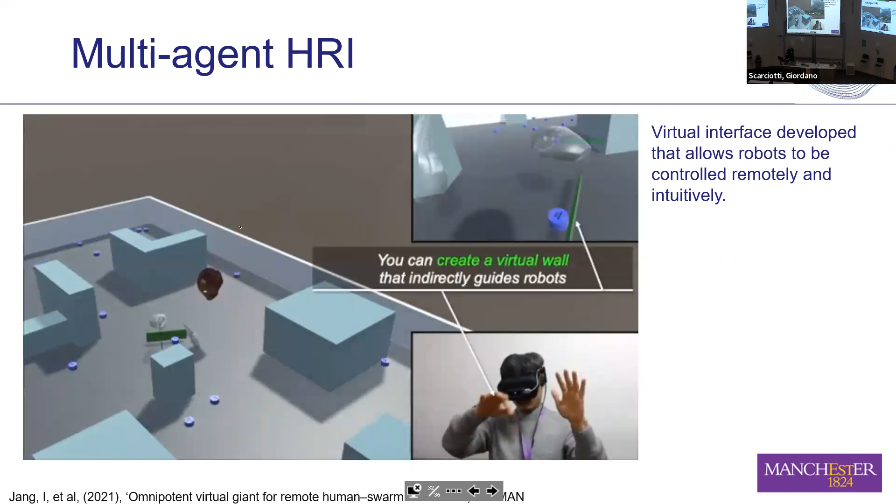And I think it should then move on to a zap forward. It might not let me. No, I'll leave it. But you can.

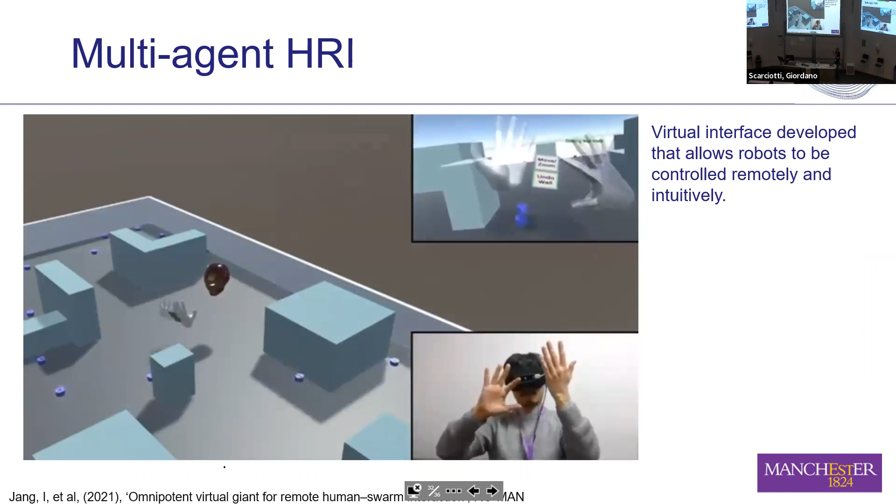So we've got this in a digital world, but it also mimics in the real world as well. So this goes into the real world. So you've got 3 robots here. So you're controlling them in the virtual world. As you move things around here, you can see the real robots are moving in sympathy. So it's connected, you're in the digital world, and it's connected to the real world.

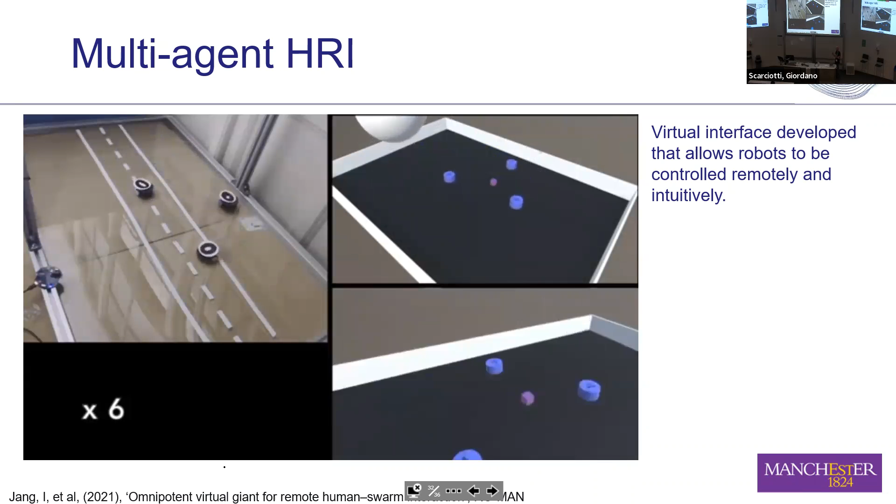So what we're looking at is how to make these things simple so that your operations staff, who don't want to spend months and months trying to learn how to use these pieces of equipment, they're not big Xbox users. Some of them might be, but they're not familiar with computer gaming things. So we're looking at how we can make their jobs a little bit easier.

And here we've got, so this is some of the control systems work that we're doing with manipulators. So again, what we're trying to do is to make things easy for the operators. Over here, we've just got a manipulator that's moving backwards and forwards. What an operator might want to do is to move it around to get it to a particular endpoint, but you always want to avoid colliding with things.

These things are really delicate. You think of some of these facilities, they're 40, 50 years old. They're designed for 20 years. You don't want to be bashing them.

So here we've got a 3D stereoscopic image of the environment. And so when we get our nice mayonnaise bottle, I did suggest they use maybe sensible things to try and avoid. So we have a mayonnaise bottle, which has appeared in that view. And so the robot needs to automatically detect that. Although you want the robot to move along, it needs to be able to detect and avoid that obstacle.

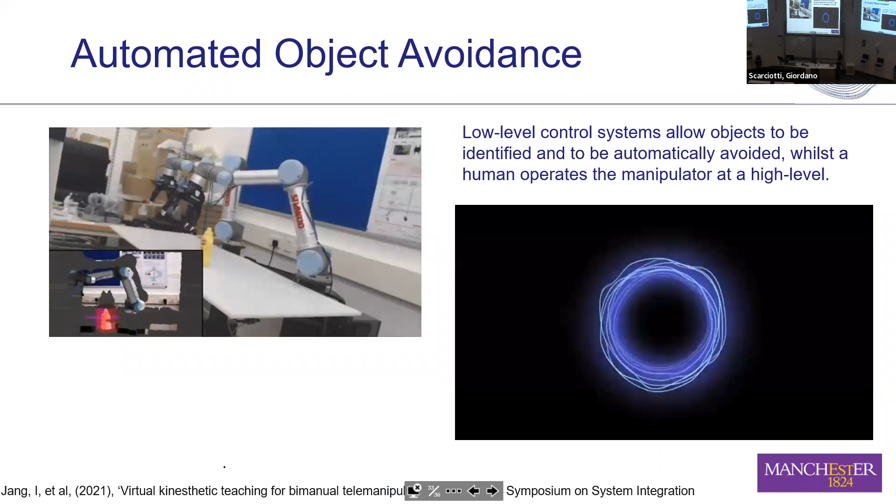So it's the low-level systems that you're trying to implement so that the user finds it an awful lot easier to operate. And then over here, we've done tests with people.

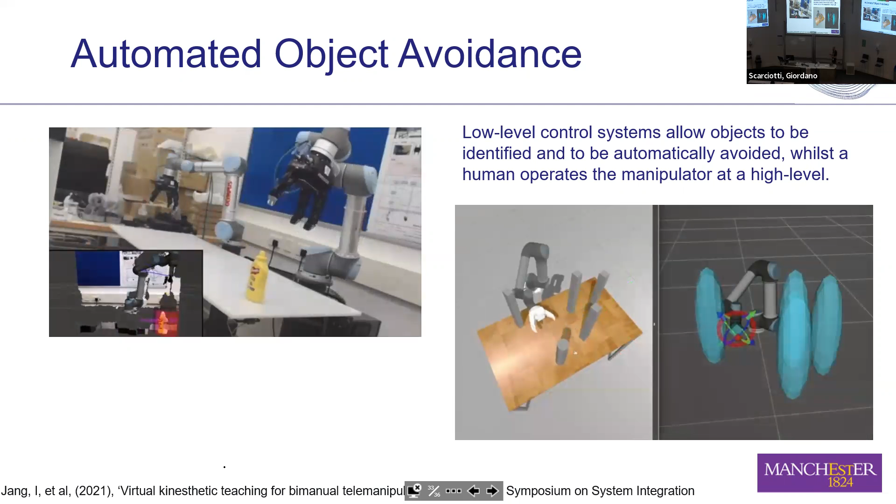So this is in the digital world, but we translate onto the robots themselves. So you've got an environment where you've got objects and clutter, and we want to go in and grab this object here. If you do this manually and you're trying to look through on multiple screens, the way that's typically done, multiple screens with different viewing angles, and you work out how you should move the arm.

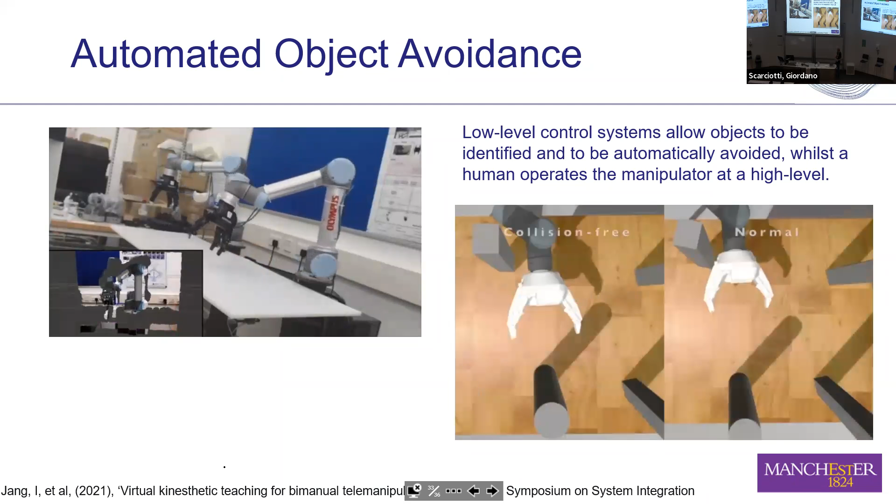It's an awful lot easier if you have a low-level system where all you're doing is saying, well, I want the arm to go there, and it's then sorting out how it should move the joints so that you don't bash into it. So here, as you move the arm up here, it will just collide with something. Here it works out that it's going to collide, and it does some low-level control systems to avoid that collision.

The other thing I mentioned earlier was that radiation does cause damage to all these systems. So if you've got anything that is silicon-based, it's not going to last forever in a gamma environment. As a human, your allowable radiation dose, total for the year, is about 20 millisieverts.

After 20 millisieverts, you can no longer work in a radioactive environment. A human can survive up to about 8 sieverts; after 8 sieverts, humans will die. So your maximum allowable dose is 20 millisieverts.

If you're a robot, most electronic systems that we've tested will survive up to about 50 to 100 sieverts equivalent—they call it grays in SI units. So robots can last an awful lot longer than humans, but they will get damaged in very high radiation environments.

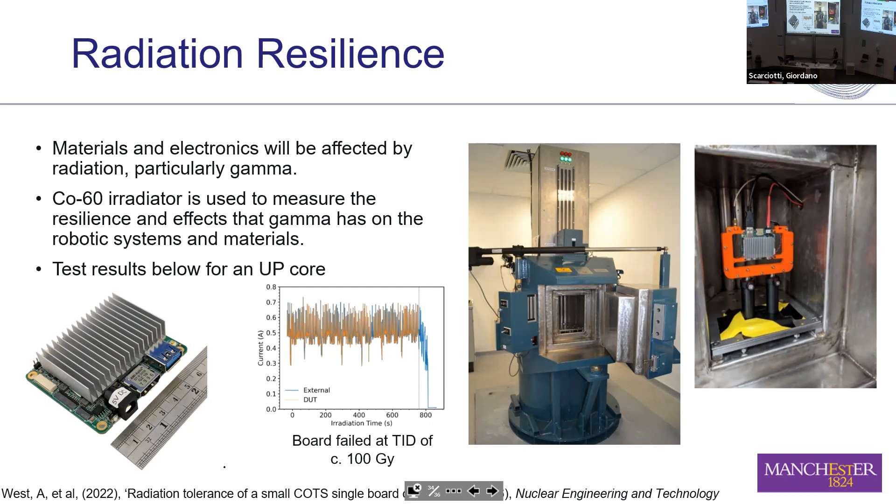So that's a summary of some of the things we've been doing. There's loads of work still needed. We need robots that are reliable, and robots that operate simply without people having to understand complex control systems—very few people understand all those complexities, so if we want them used, they have to be made simple.

We want more intuitive human-robot interfaces. Low-level systems should be automated, so you can just click on things and they'll go and pick them up—lots of systems that will just go and grasp objects.

Decision support: we're not going to get full autonomy, since the nuclear industry isn't going to allow that anytime soon. So it's decision support—the system would say you should do this first, the robot should go over here first, and you'd say yes, I agree. It's like the Simpsons sketch with the nodding duck just pressing a button—the operator would just keep saying yes, yes, yes, that seems sensible.

For control systems, it's about reliable, explainable, and trustworthy autonomy. We need to be able to explain what the autonomous systems are doing, which modern control systems allow. Communication lags are also a problem—when teleoperating these things, we want to reduce that lag.

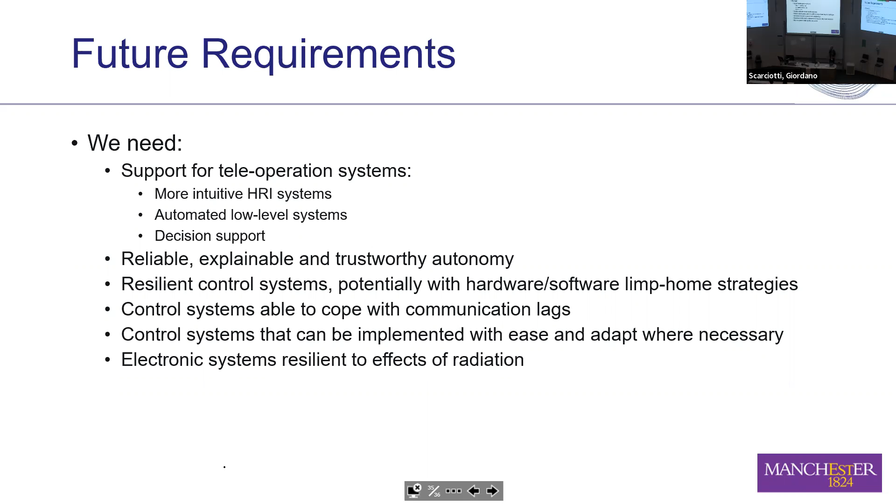We also know these robots will suffer problems and break down. Can we have redundant systems so that if they break down, we can still extract them—maybe slowly, but can we get them out of the facilities? And we want electronic systems to be resilient to radiation effects, which isn't a control problem, and it's quite difficult.